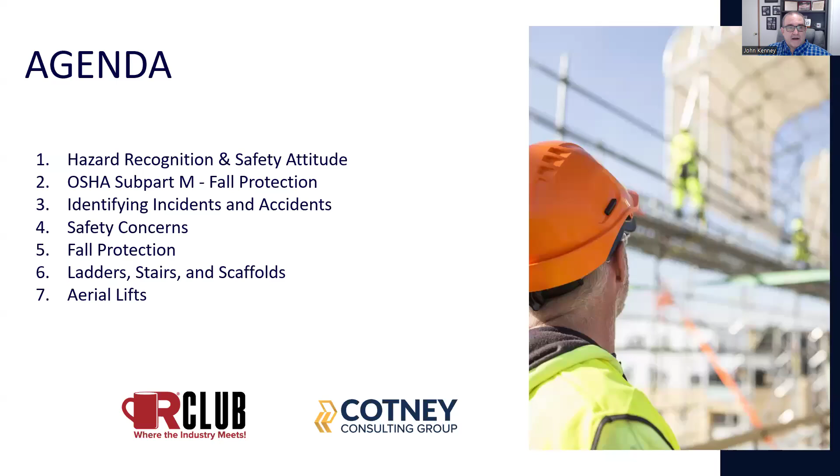So today, we're going to cover hazard recognition and safety attitude, OSHA Subpart M, fall protection, identifying incidents and accidents, safety concerns, fall protection. We're going to cover ladders, stairs, scaffolds, and aerial lifts.

So first, let's talk about hazard recognition, one of the most important parts when you start a job. Safety attitudes influence your employees' choice of actions and responses. Good workplace safety attitudes are represented by attentiveness, eagerness, alertness, and so many other things. I can't tell you how important this is for all workers to watch out for the hazardous conditions that are going to be on your job sites.

Each worker needs to take care and watch out for each other and hold everyone accountable for their actions. It takes an entire team to keep everyone safe. We all want to go home safe each day. That's the goal. It's not one person's job, it is the entire attitude of the team.

At the beginning of each day, the crew needs to go over the job and talk about what each person will be doing and go over any hazards that could be raised. This should be done at your morning daily huddle.

Everyone needs to watch for bad workplace safety attitudes, watch for tiredness, risk-taking, recklessness, selfishness, and carelessness, especially near the end of the day. As people get tired and worn out, they get reckless and accidents happen.

So you want to have someone to keep an eye on this. Your whole team should be looking out.

After working on the same job for multiple days, weeks, or even months in our industry, some people tend to get careless. And when you're getting close to completing a project, you tend to take shortcuts. This is especially important time not to let your guard down. It happens. We get more and more comfortable each day we work on a project.

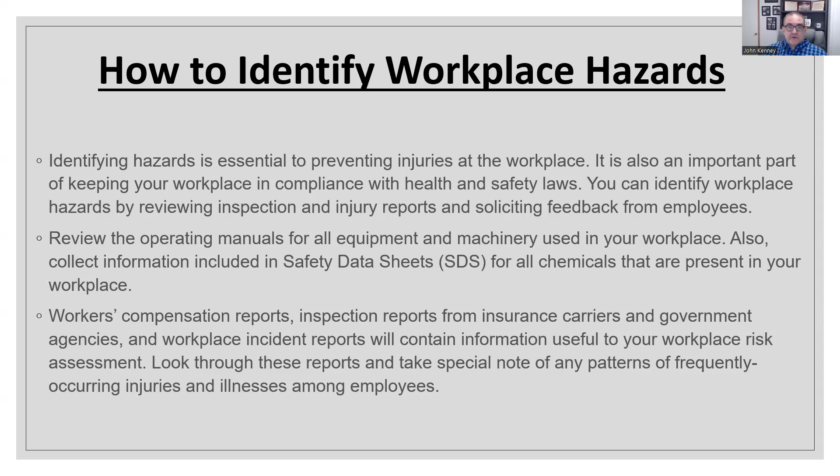Workers' compensation reports, inspection reports from insurance carriers and government agencies, workplace incident reports, will contain information very useful for what the workplace risks are most common for what you're doing. Look through these reports and take special note of any patterns or frequently occurring injuries and illnesses among employees very similar to yourself. Great source of information.

Let's talk a little bit. We're going to cover just a bit on OSHA. So OSHA was the Occupational Safety and Health Act in 1970. So everybody that's come into the industry since that point knows OSHA is a part of life. So really what it was, in sum, was to protect workers' safe and healthful conditions on a job site or working anywhere for that matter, for any employee, not just the job site, internally, warehousing, manufacturing, etc.

So for you as a roofing contractor, these are the main OSHA subpart fall protection sections that pertain to you. They're the 1926 sections. They start at 500, go up to 503, subpart M, which is A, B, C, D, and E, and you must constantly go check these out for new updates. So again, you go right up to OSHA.gov, you check these out, you can go there, you can read these for yourselves.

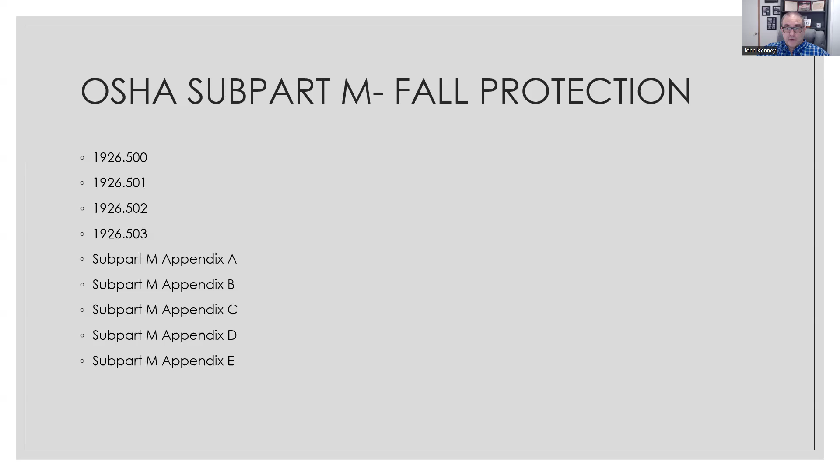But these are an important part of what OSHA is going to come out with, whether it's state OSHA or federal OSHA. They're going to come out and you're going to be gauged and judged upon how you're in compliance with these sections. And there may be others, especially in state OSHAs, that exceed these.

So I want to identify incidents and accidents.

So you want to set up a formal process for employees to report hazards they see. You can send out surveys to receive input from workers, set up a safety and health committee. It could be simply your HR or through your project management team, however you want to set it up.

I recommend having these little committees. A lot of companies don't take advantage of these, but you have representatives from your workforce in the field, your middle management overseeing it, and even your upper management as well as possibly HR in there. It really makes you think and take this information and feedback and use it to your benefit, not to have these accidents happen on your projects.

Great information. Have employees play an active role in regular safety inspections of work areas, equipment, and operations. If your employees are taking an active role and realize safety is your culture, safety becomes their culture, and it is not a punishment system, but an actual culture that is there to, one, get everybody to work safe, two, to go home safe at the end of the day, and three, do everything within compliance. There's a few other things as well, but the safety culture is so important.

Consult workers before making any major changes to the workplace, including rearranging workstations, reorganizing operations, introducing new equipment. Ask them to help you identify potential hazards that might emerge. So anytime you make a change, you want to make sure that you are getting this information out to your employees that are going to be affected by this, so they know if there are changes that need to be made, if the existing processes in place still pertain to this, or are there any specific risks that they need to be aware of due to any changes.

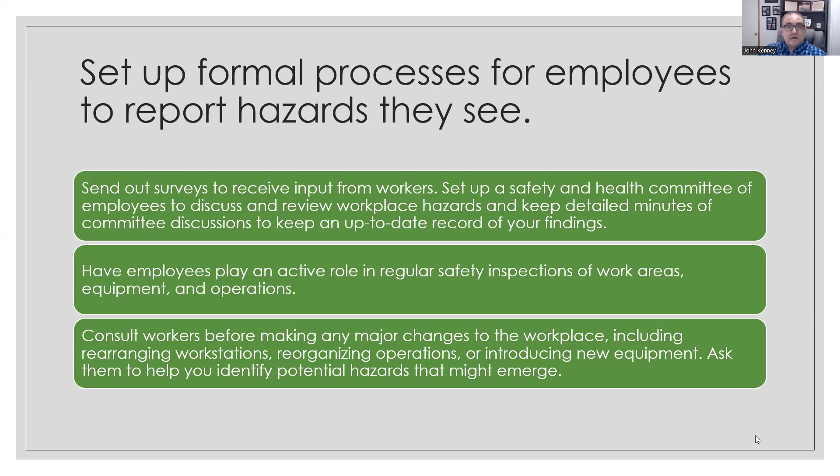How do you identify workplace hazards? Well, new hazards can enter the workplace as equipment and tools become worn over time, as employees enter and leave. During regular inspections, be sure to inspect all operations, equipment, and job site. At any given time, these things can change, so you want to make sure you do regular inspections of those items.

Create a checklist of different types of hazards to look out for during your inspections, such as trip hazards, electrical hazards, equipment operation, fire protection, etc. Create your own checklist that works the most efficiently within your own company with your team.

Take photos and videos of hazardous conditions and keep a visual record, which you can then use to come up with solutions to problems and training employees. This is not taking a safety report of your hazards and using it as a punishment tool. This is going out—you could do this prior to a job start—to look at these things and visually come up with a safety plan to train your employees with.

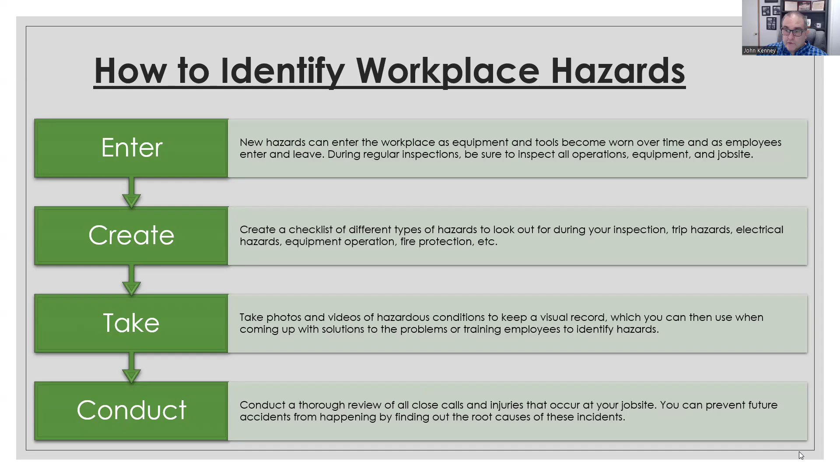Conduct a thorough review of all close calls and injuries that occur at your job site. You can prevent future accidents from happening by finding out the root cause. So if there is a near miss, or if there's something that happened or a possibility that something could have happened but it was avoided, it's a great time for retraining. You want to revisit this, talk about it, and not just with the crew it happened to, but get it out to the entire company so that can be avoided in the future. Lessons learned are so important.

Fall protection. Falls are among the most common causes of serious work-related injuries and deaths—it's number one. Employers must set up the workplace to prevent employees from falling off overhead platforms, elevated workstations, or holes in floors and roofs. So we fall into all these categories.

To prevent employees from being injured from falls, some tips you could do as employers: guard every floor hole, which in our case is going to be roof holes, unless we are climbing up through the interior of a building and these things are there. Remember, everyone is responsible for what they're going through.

You can use railing or toe boards or floor hole covers, cover them completely with plywood, and you have that safety over your roof openings. Provide a guardrail or toe board around every elevated opening, side platform, or runway. Again, you cannot have any openings without them being barricaded around or covered completely.

Other means of fall protection that may be required on certain jobs include safety harnesses and lines, safety nets, stair railings, and handrails. There are multiple ways that we'll be discussing that you can go through using.

OSHA requires employers to provide working conditions that are free of known dangers. That is the employer's responsibility. You want to keep your floors, roof areas, and work areas clean and dry as far as possible. This pertains not only to your roof environment, but also to your warehouse or any area around your shop.

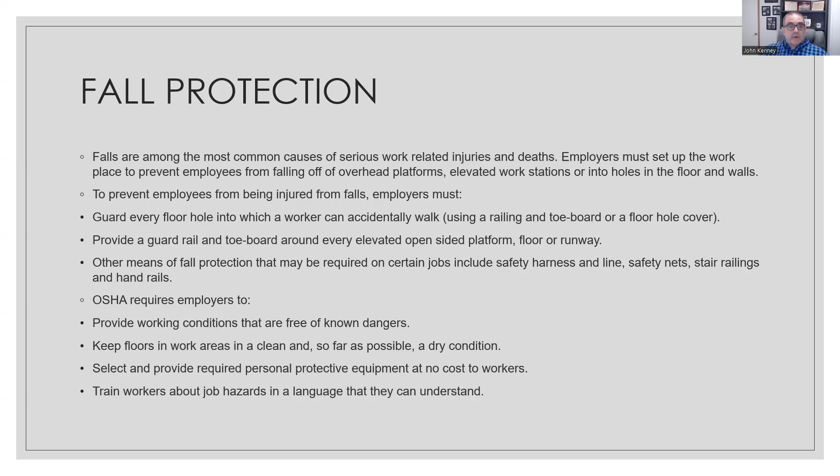Employers need to plan ahead to get the job done safely. Employers need to develop a plan and ensure proper equipment, materials, and appropriately trained workers are available.

You need to know the pitch of the roof and follow the appropriate standard. Low slope is 4 on 12 or less, which falls under 29 CFR 1926.501(b)(10) - go to OSHA and look that up. Steep slope is above 4 on 12, covered under the same section, subpart (b)(11).

Employers must provide the right equipment, including fall protection and the right kinds of ladders, scaffolds, and safety gear for the job. That is on the contractor.

Employers must train workers to use the equipment safely, including hazard recognition and protecting roofing workers, the care and safe use of ladders, scaffolding, fall protection, and other equipment. It's not sufficient to just supply this equipment - you must have an official training program. I always recommend everyone signs off at the end to confirm they understand the training they've just gone through.

Understanding the requirements of OSHA fall protection standards protects your workers exposed to falls of 6 feet or more above a lower level. You want to have trainings on how this fall protection works, and you, as the employer, must understand this in order to get that training out to your workers.

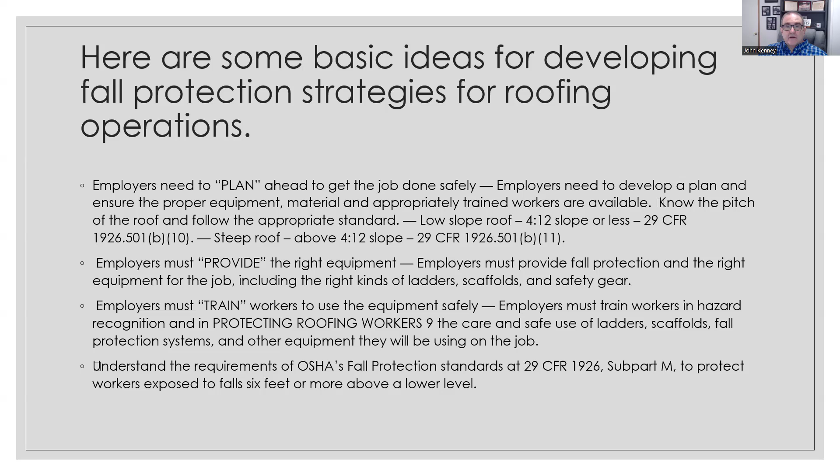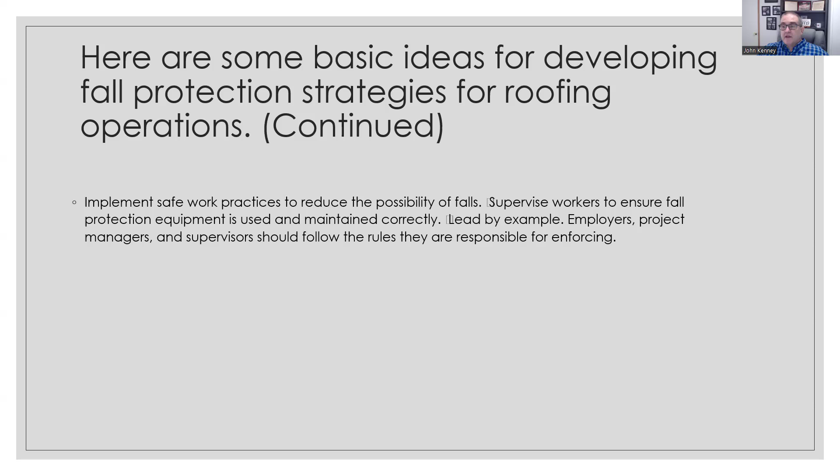Implement safe work practices to reduce the possibility of falls. Supervise workers to ensure fall protection equipment is used and maintained correctly. Lead by example - employers, project managers, and supervisors should follow the rules they're responsible for enforcing. If hard hats are required, make sure you wear hard hats when you come onto the job. Whether it's special feet protection, gloves, vests, or tie-off requirements, you need to follow the same rules as your workers so you build that safety culture and avoid being in violation of the standards.

Let's talk a little bit about safety concerns. Before beginning your job or project, focus on identifying fall protection needs. Survey the roof to determine if pre-installed anchors are available. If they are, make sure they are acceptable and of the nature allowed by OSHA. If not, plan to identify the systems needed to protect your workers from falls and have them in place before workers report to the job. Whether you use full tie-off or safety rails, have your plan in place first and make safety setup job number one.

Guard against falls through skylights and other roof openings. Use guardrail systems, personal fall arrest systems, or protective covers that will support 2 times the weight that may be imposed on them at all times.

Again, these are within the guidelines, and your manufacturers of safety equipment will work with you to come up with exactly what you need for any specific problem or safety hazard you may find on a project. So use your resources and use them wisely.

Appropriate footwear is important. Personal protective equipment, PPE, is important on any construction or roofing site, but it is critical during roof demolition. A nail or shingle-removal tool injury can cause a worker to lose concentration and fall. Again, that means sneakers are not acceptable during a lot of processes.

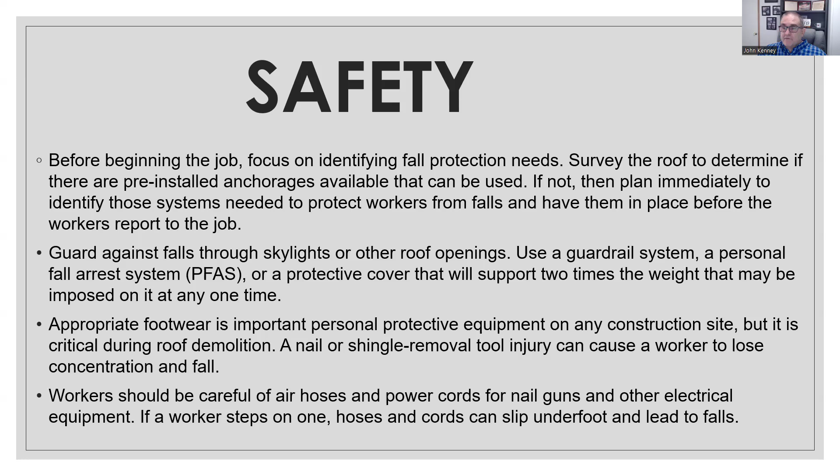Loading and unloading a roof: loose material and handheld equipment can create tripping hazards on the roof surface. To minimize exposure to fall hazards, you as the employer can stage material so workers on the roof have quick and safe access. So it goes back to other things besides safety when we talk about processes in place for efficient and safe operations.

You want to have a load plan in place. This will eliminate a lot of the hazards you're going to come up against. While handling materials on the roof, workers should hold the material on the side of their body that faces down the slope, to prevent being struck if it's dropped. If you carry something behind you and it slips, it can kick your feet out from under you and create a fall hazard.

Material can also be staged so it cannot slide off the roof and potentially strike workers on the ground. Slide guards can help keep material from sliding off the roof. Establishing a restricted area around the project's perimeter can also keep workers out of the danger zone when debris, tools, and material may fall to the ground.

This area should be posted with signs and warnings. Sometimes, especially if you have the public near your sites, you need a danger zone around your project where people cannot get into your work area perimeter. So you want to have these plans in place - this should be your initial safety plan, so it all comes naturally to you when you hit the job site.

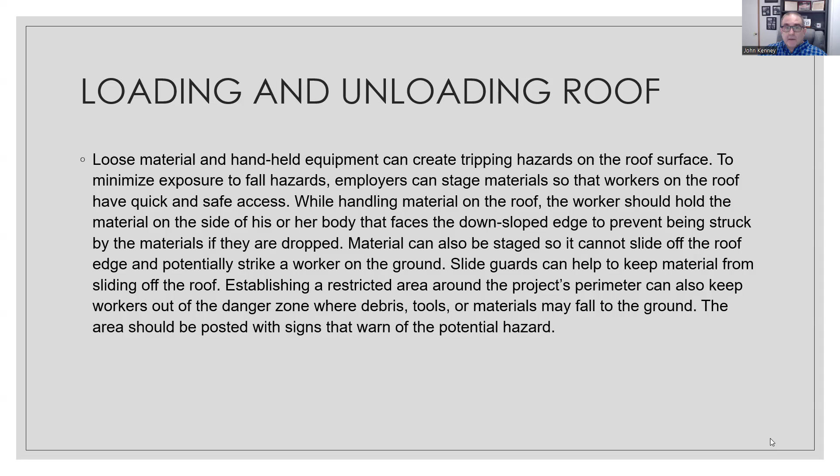Material hoist: for worker safety, choose a material hoist company committed to safety and excellence. If you're hiring somebody from the outside to do your hoisting, crane operators, make sure they're fully qualified - and professionals are, 99.9% of the time. Make sure they have all their paperwork, training, and are up to date on all OSHA regulations and everything you need for hoisting.

This includes somebody operating a low lift besides a crane, or other ways of lifting equipment to your project. You need to conduct daily hoist inspections using a check sheet for record keeping. Guards on moving parts should be in place. Inspect hooks for deformations or cracks before lifting a load.

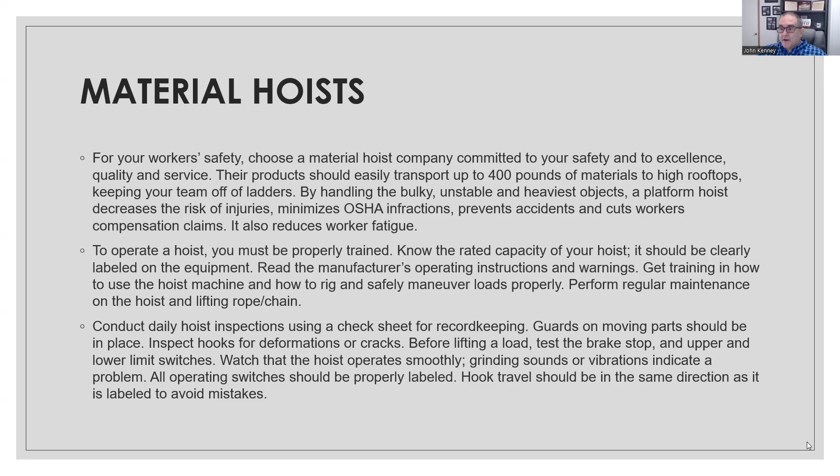Test the brake stop and the upper and lower limit switches. Again, if you're hiring an outside contractor like an equipment rental company, or somebody supplying an operator for this equipment, make sure they have this internal process in place to check everything daily before lifting actually occurs. You want to check the ropes and chains for wear, stretch, and twisting.

So if you're using a roof hoist or any other power hoist, whatever that may be, and you're operating it, you're still required to go through checking all these items. I again stress having a checklist together so you can always, at the end of the day, have a record that all this has been done - it becomes part of your daily job record.

The most common hoisting hazard is electrocution, when hoist lines or loads come in contact with overhead electrical wires. Again, you want to make sure you're surveying your work site for electrical hazards before you begin work. You must maintain proper distances from electrical lines, and de-energize them if you must work near them.

This is not always just when you're hoisting, keep this in mind when you're working on a roof. If you've got power coming into the building, power arcs 10 to 20 feet. So you've got to take the precautions, either shut the power down or make sure your workers are properly grounded, or they're working from an area beyond where the power is coming in, to avoid electrocution.

Improper rigging and overloading capacity can cause loads to suddenly fall. So always check and make sure that you're not lifting a capacity higher than whatever your slings are rated for, and that there are no cuts, tears, etc. You want to calculate that load weight and use the proper amount of rigging and latches to secure it. Always do your homework up front, make sure you're doing it safely, and you're going to avoid injuries at the end.

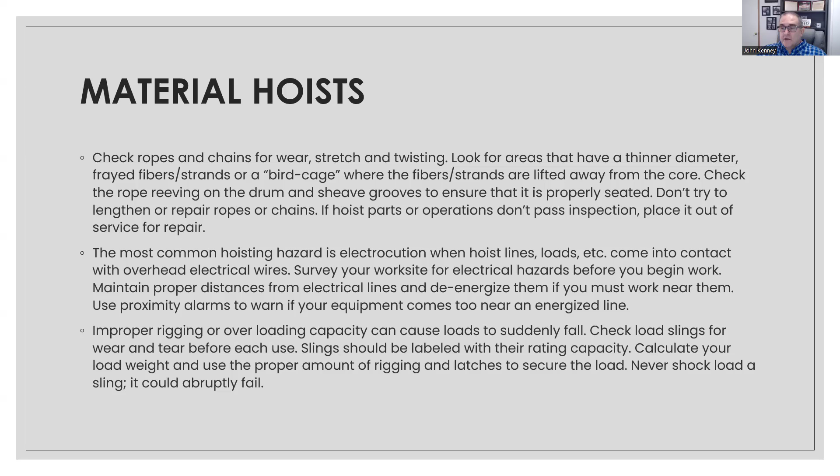Properly set up your hoist so it is on stable ground with a secure structure. For cranes, you want to make sure that you've got a solid substance, you've got your padding, you're blocking underneath your outriggers. You're not on soft ground, and you're not over top of a septic system, a water tank, gas tank, fuel tank, whatever it may be.

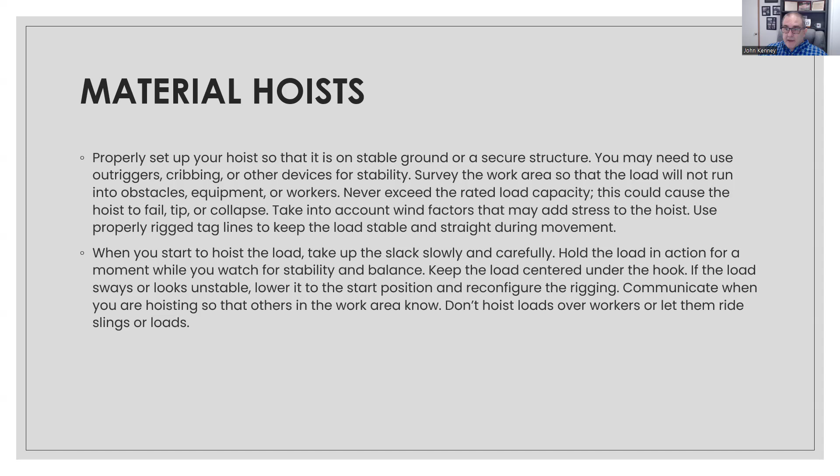When you start to hoist your load, take up the slack slowly and carefully. Hold the load in action for a moment, watch the stability and balance. Whenever you're lifting, whether it is with a power hoist, a crane, or another means, you don't want to just jerk that load up. Make sure everything is rigged correctly so you don't have a problem with a loose connection or overload, twist, bend, whatever, that could cause a fall or the load to actually collapse onto the ground.

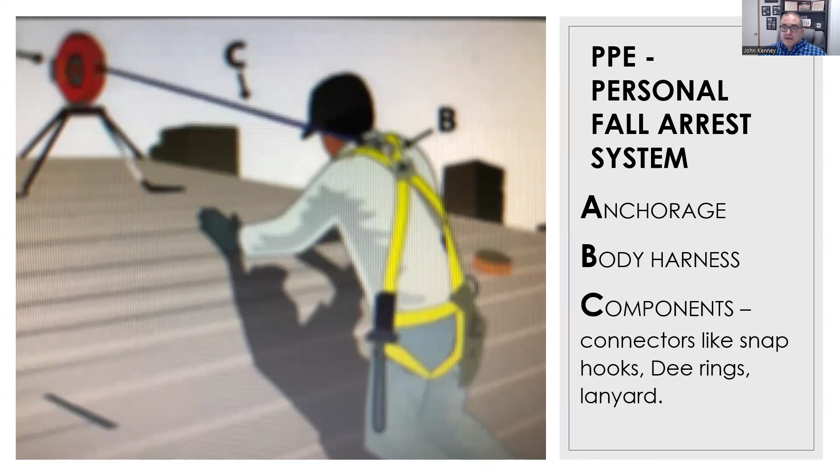Let's talk about the fall protection part. The personal fall arrest system follows the ABCs: you have anchorage, you have a body harness, and you have components. Components consist of connectors like snap hooks, D-rings, and lanyards. This is a typical photo of a typical fall protection kit. You can buy these kits that come with everything that you need to accomplish your fall protection.

Fall hazard: within 6 feet of the roof edge or openings is the area of most concern when it comes to falls. You must have fall protection if workers are exposed to a fall of 6 feet or more to a lower level. One form of fall protection is the personal fall arrest system. When used properly, these systems will arrest the fall and prevent the worker from contacting a lower level, such as the ground or another roof level below, more than 6 feet.

A personal fall arrest system consists of an anchor, a harness, and a lifeline or lanyard, usually with a deceleration device that will break. A PFAS must be used properly to be effective. Adjust the harness to fit snugly. The D-ring attachment of the harness should be centered between the worker's shoulder blades, and the leg straps should be adjusted until they're snug. Fall arrest systems must be designed and set up to prevent a worker from free falling more than 6 feet or contacting a lower level or the ground.

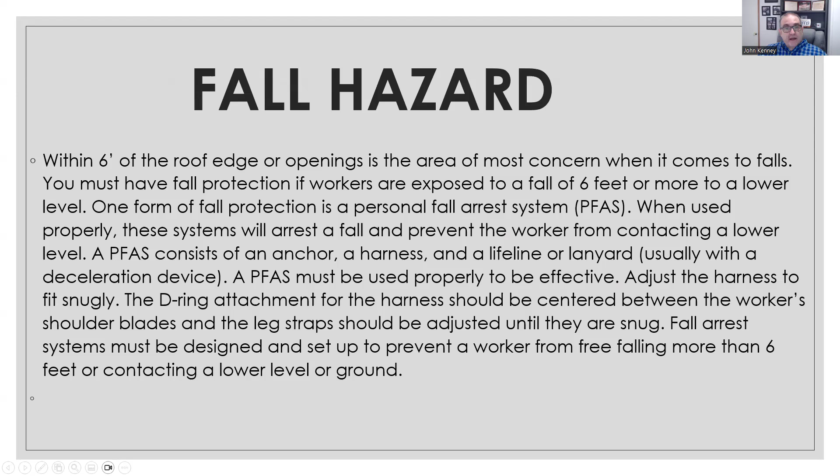Make sure you go through proper pre-training on all of this and have your workers sign off through your training program, so they are out there trained and safe.

The anchorage for a fall arrest system must be capable of supporting 5,000 pounds per worker attached, or be designed, installed, and used under the supervision of a qualified person, as part of a complete personal fall arrest system that maintains a safety factor of at least 2.

During roofing work, it is important not to attach anchors to sheathing, single trusses, or most guardrails. These are typically not strong enough to meet OSHA standard. Instead of attaching the anchors to the sheathing alone, attach the anchor to a structural member by fastening through the sheathing into the rafter or truss member below. It's important to follow the manufacturer's instructions when installing these. All of these come with proper fastening for different substrates, conditions, and types of building structures you're going into, including concrete walls, etc.

As an employer, you must ensure fall arrest equipment that has been subjected to the forces of a fall is taken out of service until it has been inspected by a competent person and determined to be undamaged and suitable for reuse. You've got to be real careful with this—sometimes it's not worth putting anything back in service, you get new equipment after there's been a problem. So if you're planning on putting this type of program in place, make sure you're dealing with a certified safety professional who can do this for you.

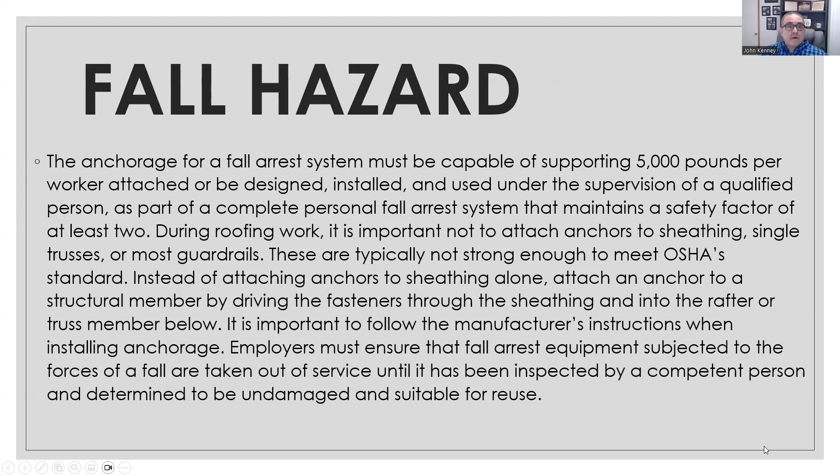Ladders, stairs, and scaffolds.

Extension ladders and step ladders are the two most common types of ladders you're going to find on roofing sites. Employers must ensure the ladders are inspected by a competent person for visible defects on a daily basis prior to each use.

Secure footing for all ladders is important. Ladders must be used only on stable and level surfaces unless they are secured to prevent accidental displacement. Being level and on solid surfaces is most important, unless it's a fixed ladder going up.

You may need to take steps to create a secure footing that will support the ladder without it sinking, shifting, or sliding. Not necessarily will this condition already exist on site — you may have to create a condition that meets these standards.

You must always ensure that the areas at the top and bottom of the ladder are kept clear, and ladders must not be placed in areas of traffic such as driveways or doorways unless they are secured to prevent accidental displacement or protected from traffic with a barricade.

So if there's a doorway that is locked where it cannot be opened from the inside, and you have a barricade keeping somebody from coming in from the outside, that usually will meet the standard. But if there is any way you can avoid this simply by moving it, always do that.

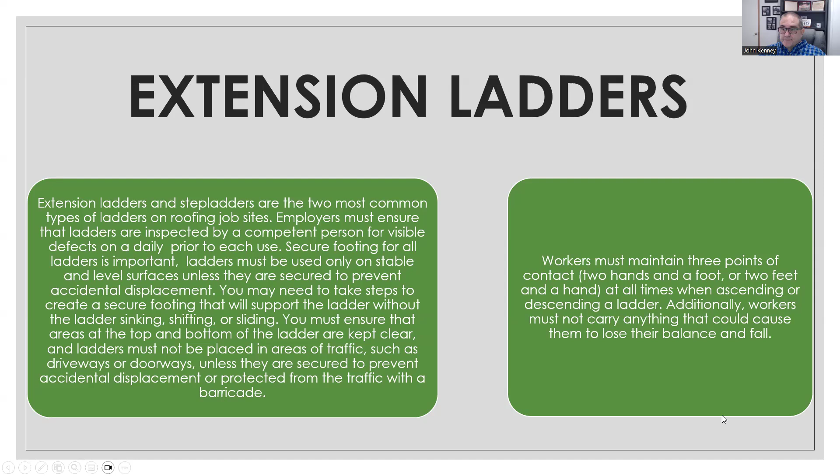Extension ladders are set to an angle, so the horizontal distance between the top support and the foot of the ladder is approximately 1/4, or 25%, of the working length of the ladder — a 1-to-4 ratio.

The side rails of the ladder generally must extend 3 feet above the upper landing surface the worker is trying to access. When such an extension is not possible because of the ladder's length, the ladder must be secured at the top with a rigid support that will not deflect, and a grasping point such as a grab rail must be provided for mounting and dismounting.

To clarify, your ladder must always extend properly, and you need guardrails where required. If a ladder does not extend, you need to find 3 feet or above — find another method or get a longer ladder, whatever it may be. But being a foot above the roof does not meet the standard.

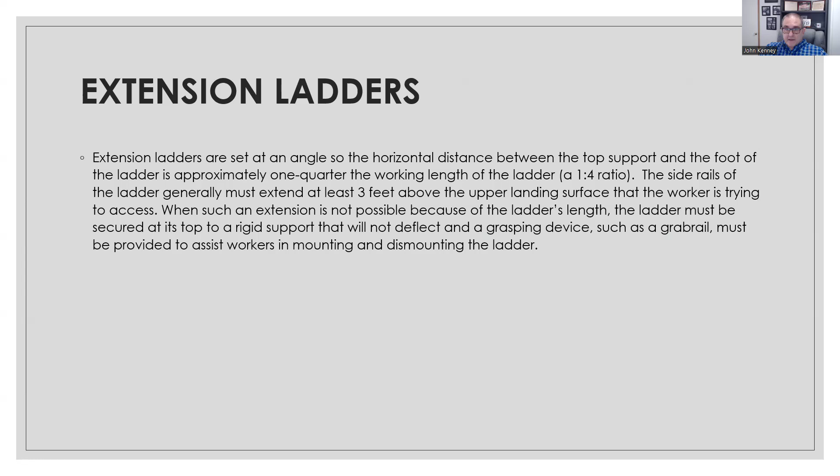Step ladders: you cannot lean a step ladder against a wall or anything to work off of. You need to ensure workers are using step ladders in the fully open position. Workers must not use the very top of the step ladder as a step — doing so could lead to serious injury.

I've seen these ladders used so wrong on so many projects. They're not meant to be leaned up against something unopened to get to the next level. Use a step ladder correctly or you will have injury or fines.

Scaffoldings must be designed by a qualified person and must be constructed to load. What I want to say is, if you are not a scaffolding installation company or specifically have trained your employees to be scaffolding erectors, it's always best to go outside to a competent company that can erect these scaffolds for you — but you still need to do the daily inspections to ensure everything is correct.

Again, safety is of the utmost importance, and if you're not qualified to set scaffolding up, you will be in violation of this. So know that.

Workers are most vulnerable to fall hazards when climbing on or off a scaffold. Therefore, you need to provide safe scaffold access. When scaffold platforms are more than 2 feet above or below the point of access, workers must use proper access methods.

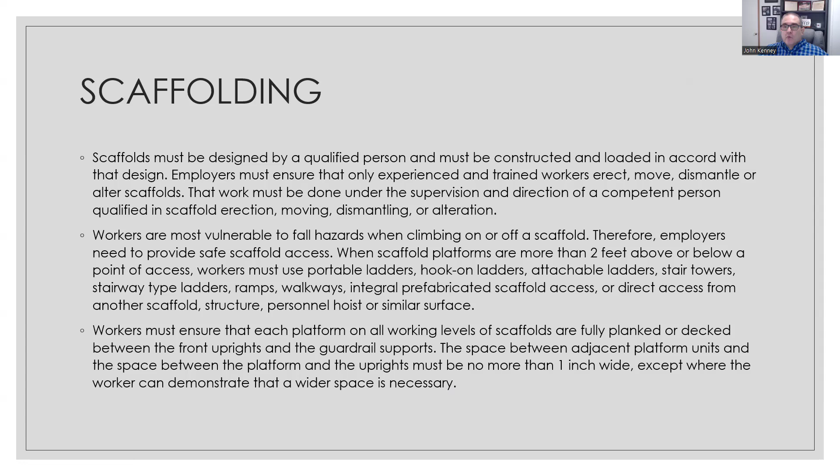Workers must ensure the scaffold is protected from falls when more than 10 feet above the lower level. Workers often use guardrails to provide this protection. Guardrails used to comply with OSHA's fall protection requirements for scaffolds must be installed along all open sides or ends and the ends of the platforms.

Generally, the top rails must be installed between 36 or 38 and 45 inches above the platform surface, depending on the type and age of the scaffold. Depending on where you're getting your scaffold from, 36 is your minimum and 45 is usually your maximum.

Top rails must be able to withstand, without failure, a force applied in a downward or horizontal direction at any point along the top edge of the rail, at least 100 pounds for single point and 2-point adjustable suspension scaffolds, and at least 200 pounds for all other scaffolds.

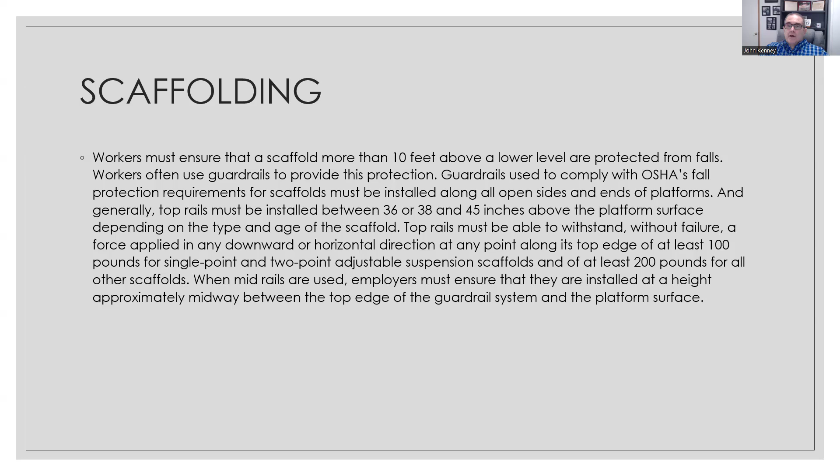When mid rails are used, employers must ensure that they are installed at a height approximately midway between the top of the rail and the platform surface.

So let's talk about aerial lifts, we'll wrap up with this. Workers can use aerial lifts to work at the edge of a roof while standing in a lift basket.

Employers must only permit authorized workers to operate extensible and articulating boom lifts. Again, you have to be trained, not everyone can just jump in these and take off. Workers must ensure that controls for extending and articulating arms are tested daily before use, that they're functioning safely.

With respect to these types of booms and lifts, employers must ensure that all workers stand firmly on the basket floor, do not sit or climb on the edge of the basket, or use planks, ladders, or other devices to gain a better work position. Workers must be tied off to the boom or basket.

You must be tied off with fall protection, the same as you would be in any other instance on a roof. You cannot just be in the basket and be able to fall out. You cannot put a ladder and extend up to work out of, or put a platform across the top to get extra height. They have to be used for what they're intended for.

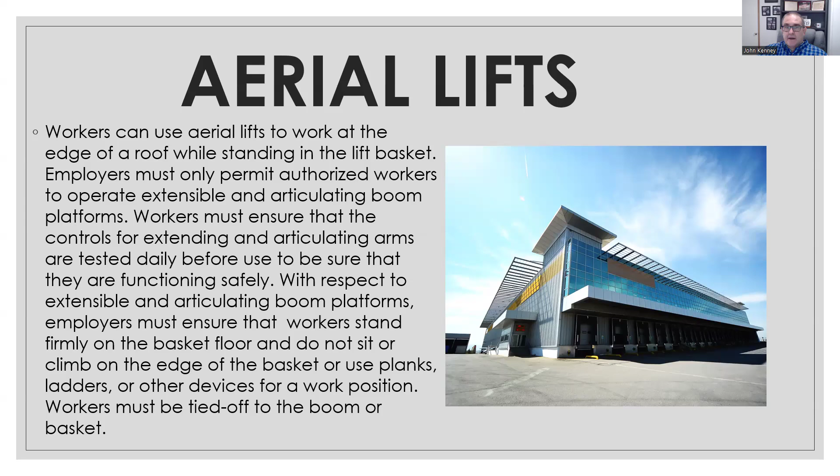And again, everyone has to be trained properly and have a sign off on your training.

So what were the key takeaways today? First of all, you've got to start out with a safety culture. This plays a critical role in maintaining a positive safety attitude, recognition of hazards, and preventing all workplace accidents. Start with the culture, absolutely important.

Then you must adhere to the OSHA subpart M's that we talked about. Go there, read them, understand them. Make sure that your safety program takes all of those into consideration when you develop it and train on it.

Proactive hazard management, early identification of fall risks, regular safety inspections, and employee involvement in safety processes is the key to your success in having a safe daily workspace. You must do your pre-planning, pre-job check, regularly inspect for safety issues, and have your employees be involved in the process to police the action and come up with solutions and feedback for you.

Effective use of equipment. All equipment has a purpose, just like all roofs have a purpose. Not every roof is meant for every purpose. Same goes with your fall protection, your ladders, and other safety equipment and lifts. Use them as they are intended to be used.

Continuous safety education is so important. Do trainings like these on a monthly basis, have your toolbox talks, yearly training meetings, mid-year meetings, whatever it takes in your company to keep your workers safe. The greatest investment you can make in your company is on safety. You want everyone to come home safe and sound each and every day. Once your company has a safety culture, it becomes one of the best recruiting tools in the industry.